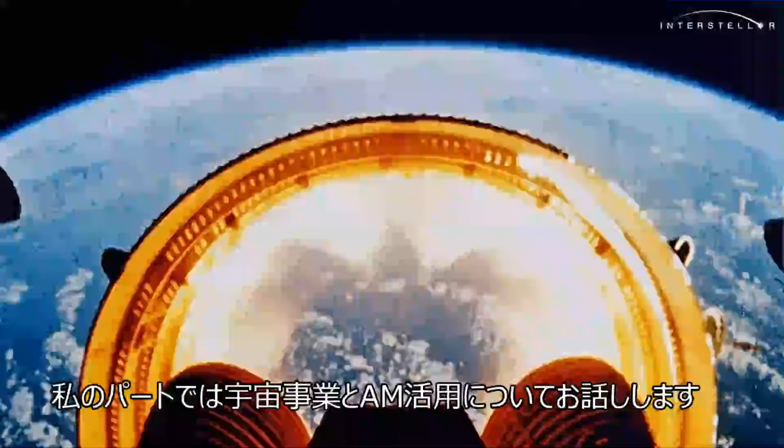So I show this picture when I do a lot of presentations to try to orient people that may not be too specific or in close touch with what's happening in space with propulsion and launch vehicles, and even exploration beyond low Earth orbit.

This is a shot of the Saturn V when it's staging in Earth orbit right before it gets ready to take the astronauts to the moon.

And this is one of those images that for me really tells the story of where Interstellar is focused on the technology and the capability to move people and cargo out into the solar system.

One of the ways that we're going to help accelerate that process is through advanced technology for propulsion systems and then spacecraft systems as a part of our long-term vision.

So our team is very experienced. I mentioned the three founders, but we have a rich heritage with over 130 years of experience across a variety of different industry and government programs.

We're definitely well experienced with all of the different propellant combinations, from kerosene to methane to hydrogen-based systems and storables.

And we have one of the more unique teams and capabilities in small business in aerospace for a startup in the industry today. I'm really excited to have this group of folks with me as we push the boundaries and the envelope of human expansion into space.

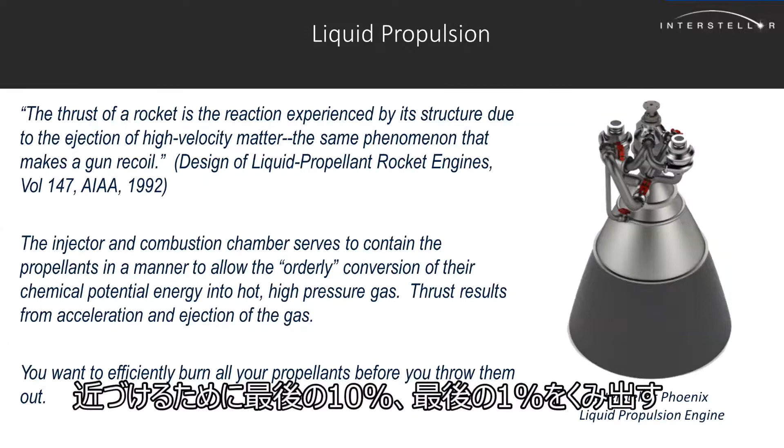And so the goal of the engineer as they design injector systems is always striving to eke out that last 10%, that last 1%, to get as close to 100% efficiency as possible.

So I also wanted to add a few words on engine cycles. There's a lot of different engine cycles. The point here is that not all engine systems are the same, but I'm fortunate to live in a time...

When I started my career, there was only a few places that you could work on engine systems. You could go to work for NASA, you could go to work with Aerojet or Rocketdyne, but there were very few places, you know, 20, 25 years ago where you could go work on the development of these systems.

Now we live in an era where we've really started to commercialize space, where there's so many opportunities for engineers to work on a variety of new types of systems.

So let's talk about what some of those systems look like, and then who is using those type of systems in the industry right now. Because we're really experiencing a renaissance in space that kind of rivals the 1960s, the late 50s and 60s, when we had the surge in the space program through Mercury, Gemini, and Apollo.

You have a gas that's pressurized, like helium, and it pressurizes the tanks to higher pressure, and then it pushes the propellant to the injector, and it's combusted in the combustion chamber. That's one of the simplest systems, but it's also one of the heaviest for a rocket. The higher pressure in your fuel and oxidizer tanks, the thicker the walls have to be, the heavier the rocket is, the less payload you can get to orbit.

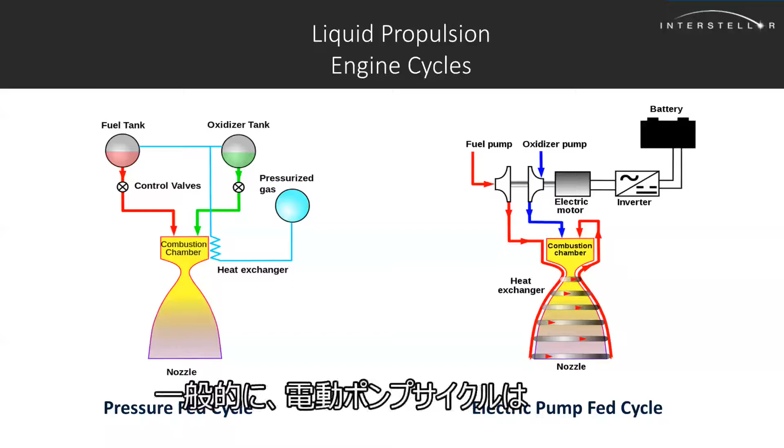These systems are typically less effective at higher and higher thrust levels because of the battery demands, electrical demands, and the weight of the electric motors required at higher and higher thrust levels.

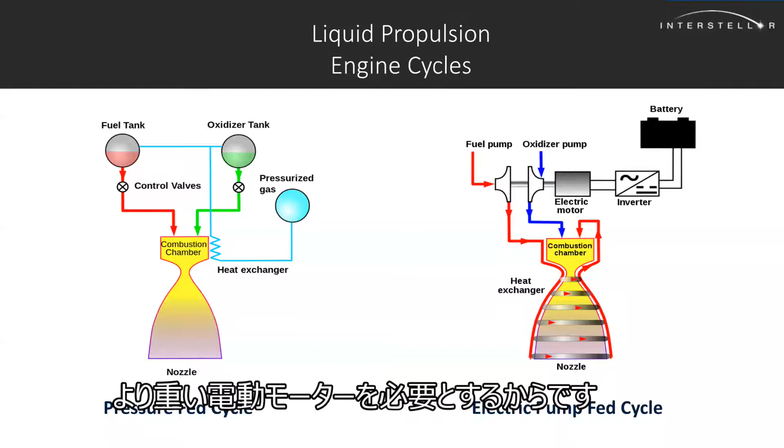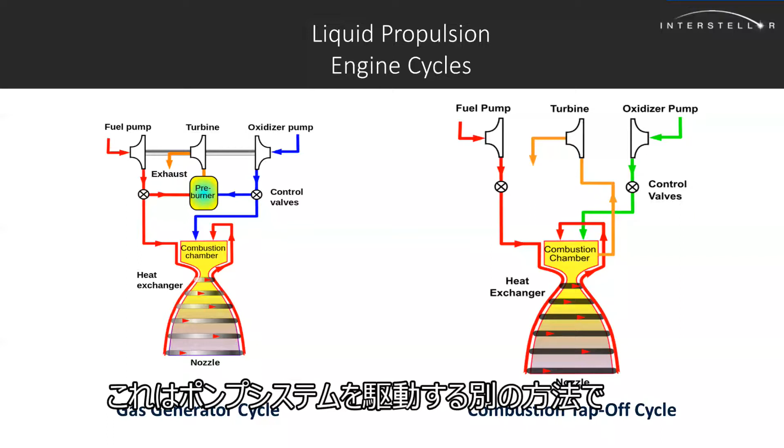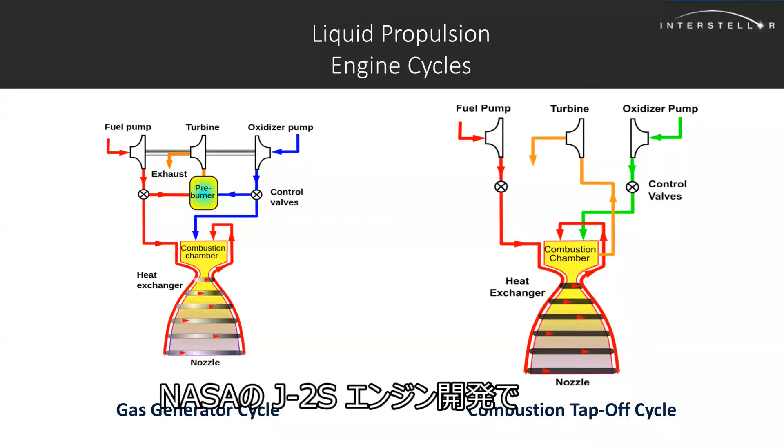A really interesting cycle on the right is the tap-off cycle. Blue Origin uses the tap-off cycle. They take a little bit of combustion chamber gas on their BE-3 engine to drive their turbine. It's another way to drive that pump system, spins up the impellers in the pump and drives the pressure to the engine system. It was also used on a variant of the J2 engine in development with NASA and Rocketdyne many years ago.

Before I get into this last one, the reason I'm showing this is to give a little bit of introduction to the different types of engines, and also they all utilize similar components. The cycles are laid out differently depending on the level of complexity and performance that is acceptable or required. But for those that are interested, there's a couple of great reference books out there that go over all of this information in great detail. They're kind of the aerospace engineer, rocket engineer Bible, so to speak. There's Rocket Propulsion Elements by Sutton, which is a fantastic reference.

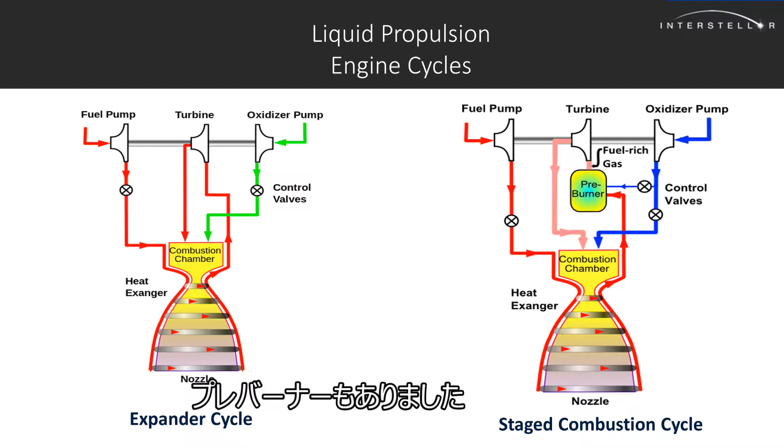So the staged combustion cycle is representative of the space shuttle main engine, and then the expander cycle is what you would find in the RL-10 system, which is an upper stage engine. The expander cycle is a very simplified cycle. It takes the energy off of the nozzle in the combustion chamber and heats up the coolant, or the fuel in this case, to drive the turbine. So again, all these systems have some flavor of pump, combustion chamber, and nozzle. Some of the flavors have a gas generator or pre-burner as well. But a lot more nuance than maybe what has been understood by the layperson in terms of liquid propulsion.

So I wanted to show where some of these components live in a real engine rendering. At Interstellar, we really leverage advanced manufacturing and 3D printing with our innovative clean sheet approach. What we do is really different than anybody else, because we've rethought how we do design for propulsion and spacecraft systems to take full advantage of the capabilities that exist in the additive manufacturing landscape. And as you'll see later, we're really innovating even beyond that, pushing the additive capability even farther than present day to enable unique designs and performance improvements that haven't yet been seen in the industry, and we're excited to bring that to the forefront.

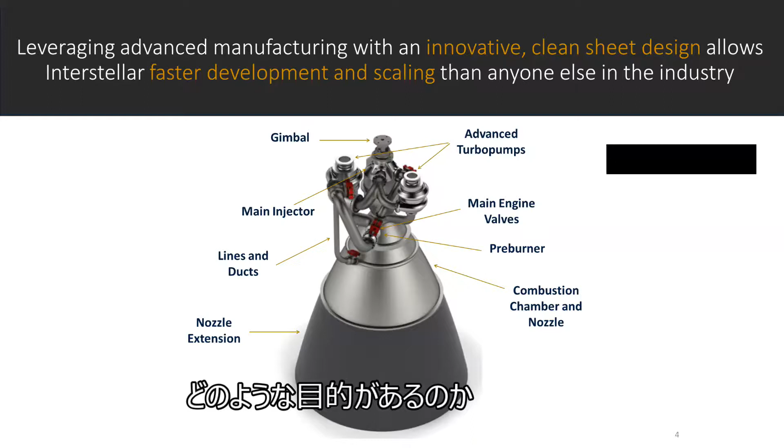On the lower part of the chart, you can see some of the basic component features of the rocket engine: the gimbal, which attaches to the vehicle and allows the engine to move to steer the vehicle, advanced turbopumps, the main injector, main valves, lines and ducts, the nozzle, and the combustion chamber. Wanted to give folks a feel for where these components live and their purpose in terms of the engine cycles we discussed.

Liquid propulsion hardware is really ideal for additive manufacturing. To tell a bit of a story, when I started my career 25 years ago, it would take years and millions of dollars to work through R&D because of the complexity of assembling hardware for a rocket engine system that needed to survive extreme thermal environments. You have cryogenic temperatures on the pump ends and 5,000-plus degree flame temperatures in the combustion chamber, daring to melt the whole system down. You'll never find a more challenging engineering environment than developing a new rocket engine system.

It requires so many disciplines—at least 13 different engineering disciplines involved in the turbo machinery alone, plus multiple disciplines for every component and then marrying the system itself. Because of the extreme environments, it drove extreme manufacturing techniques, which drove a ton of touch labor and extreme costs—that's why launch vehicle systems have historically been so expensive. The hardware is complex because the environment is extreme, and these systems were also expendable, thrown away after every use, which obviously isn't super cost effective.

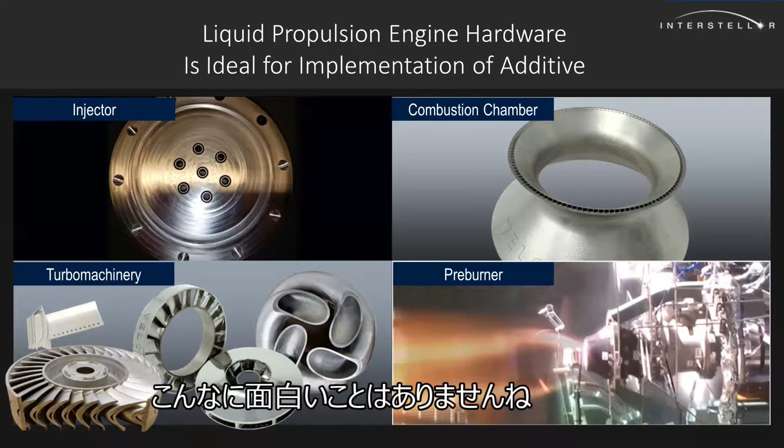But even with all that said, especially with the rocket engine impellers on the turbopumps, there are still some limits to the geometry. Ideally, you have some pretty complex high angles and extreme curvature requirements within those pump impeller geometries that, as a designer, you'd really want to use to make the components smaller and lighter and higher performing. But even up till recently, we've had limitations that most people who work in the industry and with additive understand, what the 45-degree rule means. As you change to these angles with these overhangs, as you see in this image, it gets more and more difficult to maintain structural integrity as well as surface finish. So as good as additive is, there has still historically been some limitations in the geometries we can achieve.

And then the other part of that, especially for impellers but also with every other component, is the ability to use support structure to obtain some of these desired geometric features. This is problematic because sometimes you require support structure to make your creation real that you could never fully remove, or the removal of that support structure is very costly and time intensive. So this has been another focus of Interstellar working with VELO, enabling the capability of the print machines to make our design improvements come to life by eliminating that support structure completely, which really helps us focus on reducing post-processing time.

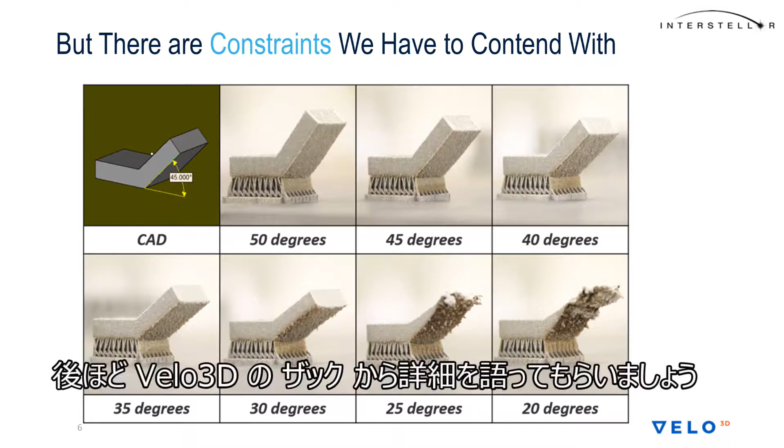And I'll invite Zach to comment here a little bit as well, but we can go ahead to the next chart. Some of these challenges are on this chart as we segue from that last one. I've mentioned a lot of these things already, but also, when you talk about NDT and qual inspect, Zach's going to talk about that a little bit more here in a second, but all those things are critical.

When we first started using additive a few years ago, there was a lot of concern about flying these parts on different launch vehicle systems and our ability to qualify and certify that. We've come so far with our ability to produce additive hardware for engine systems with the material properties required to survive those extreme environments. So when you take a system like Interstellar is developing, where we have quite a bit of reusability and life required of our parts, the early days of additive, the material properties really didn't lend themselves to that.

But with the improvement in the technology, especially over the last 5 years, and now taking a step beyond that with Sapphire, it really helps with the longevity and life of our parts and our ability to run them through the test programs that our customers require for certification and qualification.

For us in development, though, it's really all about that time for post-processing, like I mentioned before, speeding the pace of development, which is great, but also that translates into production as well. So when we look at our first product, or one of our first products, which is our Phoenix engine system, it's not just about using additive for development, but also how that development cycle translates into production, because this is an all-additive system, and that's where the industry is moving.

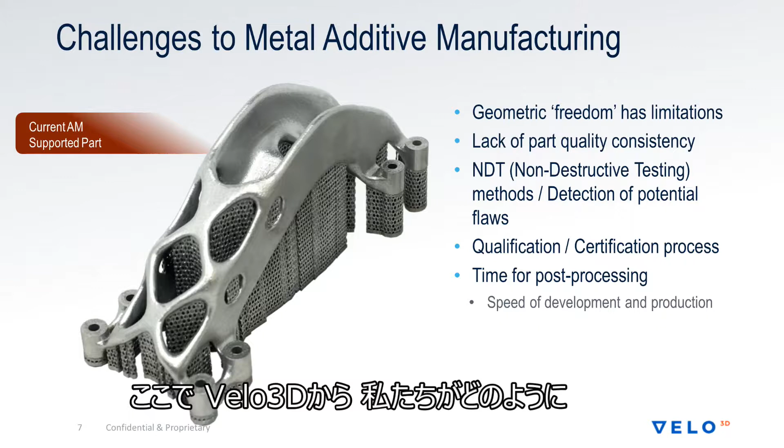That's the right way to go, and we have more work to do on the post-processing front, especially when it comes to support structure and heat treatments, etc. But I think that's a nice place to invite Zach to jump in and talk about some of the ways we're tackling these challenges on the print side.

I really appreciate it, Jeff. My goal here is to provide a little bit of background as to what VELO is trying to accomplish and how we're working with companies, especially like Interstellar, who are really pushing the boundaries of what's possible and utilizing our technology to advance their systems pretty dramatically.

As Jeff mentioned, one of the parts that has always been a really good candidate for metal additive manufacturing is a shrouded impeller, which you see on the right. This is one of our canonical parts for VELO3D because it's a part we really focused on when developing our process and system to extend the capabilities of laser powder bed fusion, which is what our system does.

So you can see here on top how you would need to support a shrouded impeller if you were building it on a traditional laser powder bed system. All of the red lines you see are support structures. If you were to print this on a conventional system, you could print it, but then you have to deal with getting those support structures out in order to have a usable part. This really makes laser powder bed fusion a non-viable solution for these very complex geometries with internal passages.

So VELO3D set about to develop a process and a system that could really extend the capabilities of metal AM to the point where they would start to be much more widely useful across a range of applications. This bottom picture shows how you would print the part on the Sapphire system, and what we've been able to do here is eliminate all of the internal support structure.

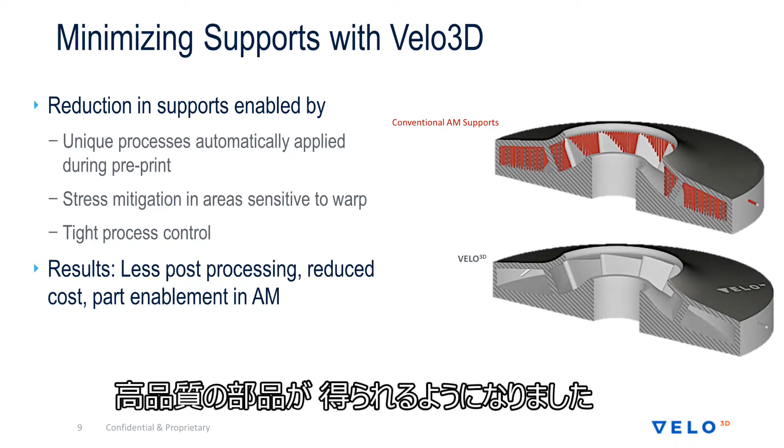We focused pretty intensely on process control and metrology to be able to operate our system in a much tighter process window. This is what really enables us to print low angles, and to change the machine architecture in such a way that you can print low angles consistently and know that you're going to get good quality parts out at the end of the day.

So as Jeff mentioned, one of the main drivers for using metal additive manufacturing is to reduce the iteration cycles and get to a final system configuration much more quickly. It's definitely an effective tool in that regard. But in addition to speed, one of the other things you have to deal with is cost.

I like to say that engineers will always find a way to make something. If they need a part, there's always a way to manufacture it. But often that comes at a pretty hefty cost. And if you're looking at making a complex system like a rocket engine or turbo machinery, you can get those parts, but it's going to be relatively expensive.

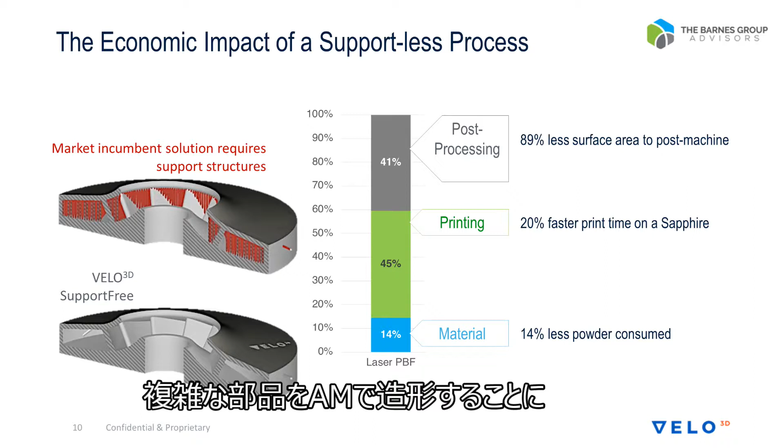So not only are we able to reduce the design cycle time to get these parts, but the cost is also dramatically reduced, because a lot of the cost of additive parts is really in the post-processing. We see examples where almost half of the final part cost is due to post-processing. So if you can reduce that as well as reducing the cycle time, then you really start to democratize the manufacturing of some of these really complex parts and systems.

What is our system capable of? When we look at the applications where we can really provide quite a bit of benefit, turbo machinery and rocket engines have a lot of the geometries that capitalize on our technical capabilities. So if you look at some of the examples on this slide, on the left-hand side we have impellers or turbine components, and really here what we're using is our low angle capabilities.

And this impeller that you see here is actually 0 degrees on the shroud at the exit of the shroud, on the OD of the impeller. So the shroud is completely horizontal at that point.

We're able to print down to 0 degrees without using a support structure, which means that this part doesn't require any support removal at the end of the day after you finish printing it.

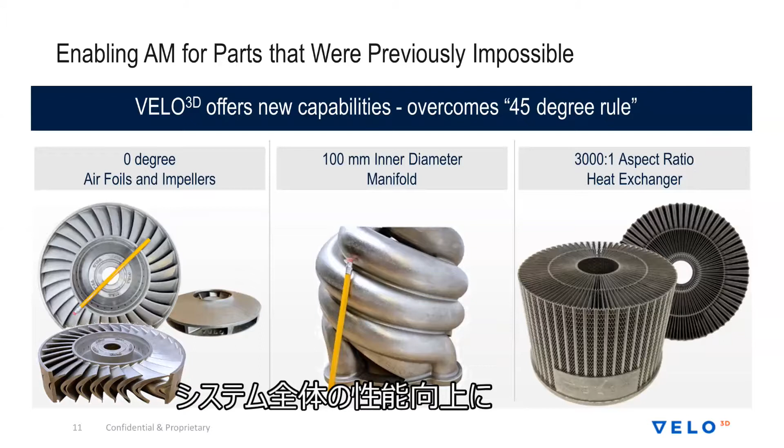One of the places this is very useful is if you have heat exchangers on a system, or if you're looking at a smaller rocket engine, a smaller nozzle and combustion chamber, and the regeneratively cooled flow paths inside those nozzles and chambers. So you can really leverage the capabilities across the entire system to realize performance improvements.

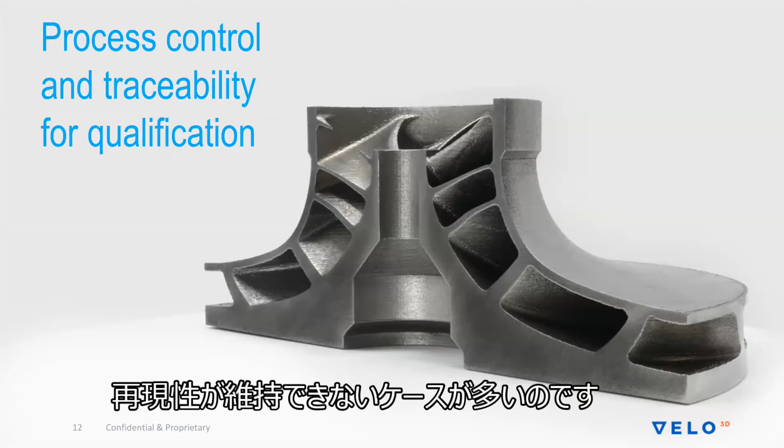One of the things we realized pretty early on is that making these geometries is definitely a step in the right direction. Enabling people to make these very challenging geometries is what's needed to expand the application space. But one of the things you also have to address is the quality of the parts. If you can print very interesting geometries, but the part quality is not good or it's highly variable, then it's not really a useful solution in a lot of very high demand, mission critical type of applications.

One of the things I like to quote whenever I'm talking about quality, and it's especially appropriate here, is the NASA Marshall Space Flight Center standards for laser powder bed fusion. This quote really captures one of the main challenges in qualifying metal additive manufacturing, which is that the largest latent risk in the utilization of laser powder bed fusion parts in critical spaceflight applications lies in the limitations to verify individual part integrity.

So summarizing what this says, the machines available today are capable of making very high quality parts. But one of the challenges you have as an engineer, as an end user of these parts, is knowing whether or not a specific part is very high quality. That's one of the things VELO3D also set out to solve, in addition to the geometric limitations, giving end customers the confidence they needed in these mission critical components.

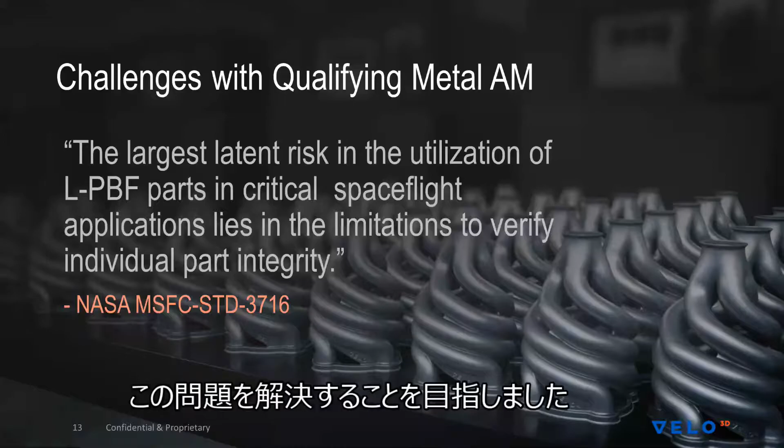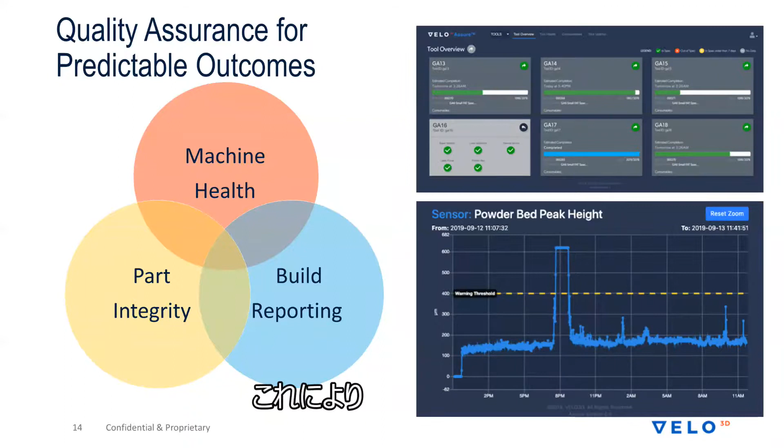So the way we approached the quality assurance problem was from three different aspects. We have machine health, knowing that the system is nominally in spec and calibrated so that you're ready to start runs, and then you know your complete fleet status of all the machines you're printing on. And then to monitor the build as it's occurring and be able to infer part integrity from that data.

The final step here is to tie all this together in an easily consumable fashion, so you have build reporting and you have traceability and documentation of not only the machines, but of the builds and the part quality once the build is finished.

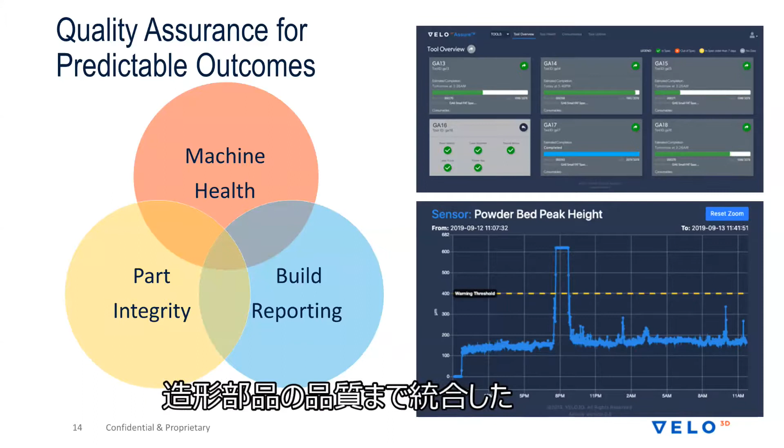The first aspect of this is machine health. And this is something that seems very rudimentary, but it really is something that's not addressed in a lot of the systems that have been available in the past.

Going back to the NASA Marshall Space Flight specs, they're requiring optical components, the optical system of these machines, to be calibrated every 90 days. In the spec, they basically give a rationale that says they would like this done more frequently, but recognize there's a lot of overhead and cost in doing this. So if we can do it every 90 days, that will at least suffice to give us confidence in the parts. But, and this is an important but, if the calibration every 90 days is found to be not within the specified limits, then all of the parts made in the previous 90 days, or until the last known good calibration, are non-conforming, which means they can essentially be scrapped.

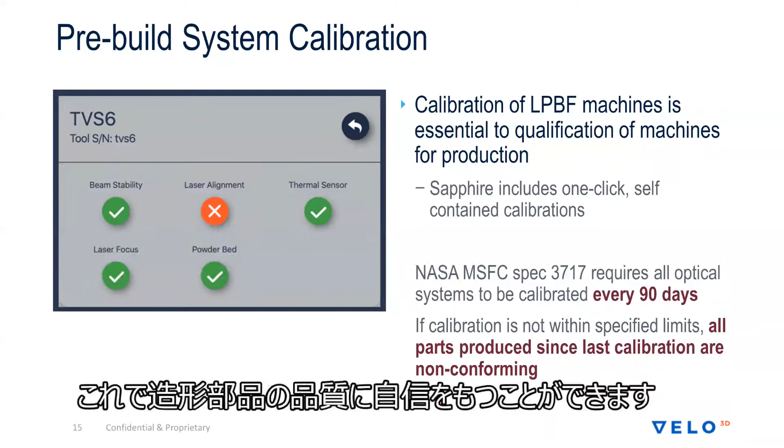And so you could have somebody who's producing parts that has made $250,000 worth of parts that are now non-conforming. So we set out to make a system that is calibratable by the user. You can do it from a single button on the user interface and check the machine calibration before every build, so you have complete confidence that the system is nominally in spec before you build a print, and every print thereafter.

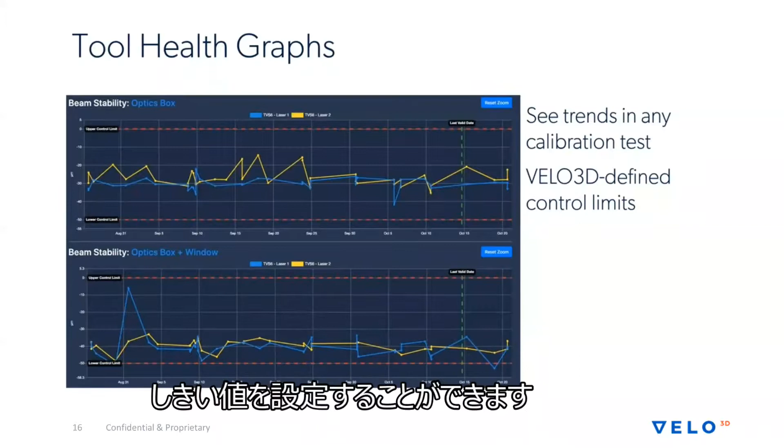One of the other critical aspects is looking at how the system is behaving over time. So we've provided control limits on all of our critical parameters and tracking of all these key parameters within our software product called Assure. This is useful not only for statistical process control as you're printing parts in production, but we also do this on a per-build basis. So in every build we're tracking the critical parameters, with control limits where we know the process is good and making good parts, so the user has much higher confidence in the quality of the part they get out of the tool at the end of the day.

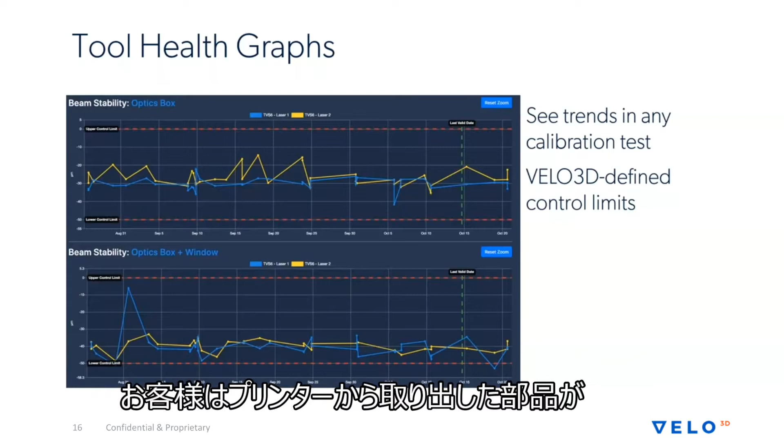So the goal here is really consistent part quality, and the way we've gone about addressing this is really captured in our Assure quality product, which gives the end user unprecedented traceability. You can do these pre-build calibrations with single clicks from the user interface, so it's easy to know the system's in spec and you're good to go to print parts. What you see here on the right is one of the readouts from the build report that shows the optical system health prior to a print, and this is included with every print.

Along with the runtime monitoring, where the build is monitored in real time with real-time reporting, and the build report generation, we feel we've captured a lot more detail around how the system's performing. This, combined with the geometric capabilities of the VELO Sapphire system, is really helping to open up a lot of new applications. It's really awesome for VELO3D as a company to be working with companies like Interstellar Technologies, who are leveraging this and starting to make some really incredible products out of it.

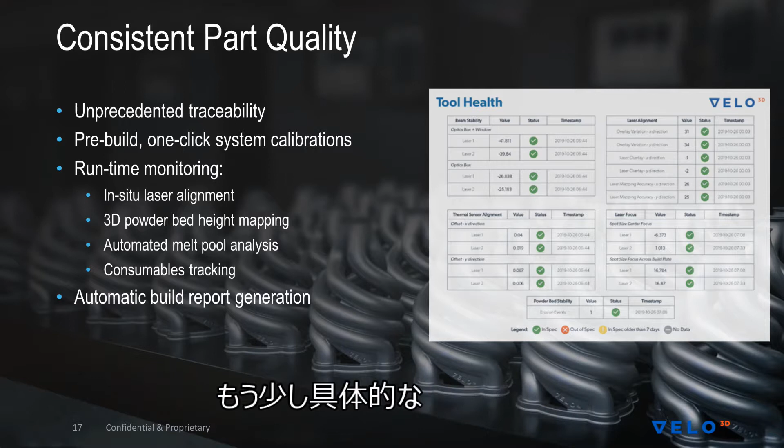With that, I can pass it back to Jeff to go into a little more detail about one of those. Thanks, Zach. So one of the questions I get all the time from people is, well, rocket engines are complicated - how do you know the parts are good?

That's why Zach's commentary was so key just now, as we get into the meat of what we've been doing recently. That's so exciting. There's been so many incredible developments in the industry to produce quality parts that have a great pathway to flight. At Interstellar, our team comes from a rich heritage of not just design and R&D, but manufacturing, testing, and flight operations for traditional as well as additive parts and systems that have gone on to do real-world missions.

And that possibility wasn't there even a few years ago. So as commercial companies grow and evolve and increase their capabilities and move into these technology areas, it's been exciting to be a part of that over the last decade or so. One of the things we do better than anybody else, though, is we've really reimagined the design process.

One of the things we focused on in years past was really how do we get the industry to produce larger parts, instead of breaking out of that smaller 300 millimeter square bubble, and move into larger and larger systems. That was an early focus of this team's energy.

But really lately, our focus has been working with companies like VELO3D and Zach, enabling newer, creative, more robust designs that were not possible even by yesterday's standards for printing. So obviously we're fully designing to utilize AM as the manufacturing approach in all the components of our Phoenix engine system. What we mean by that is that everybody's printing parts now, but there's still a lot of parts out there being produced that could be made by other means. And that's not the full utilization of the technology, especially from an innovative standpoint at a company like Interstellar.

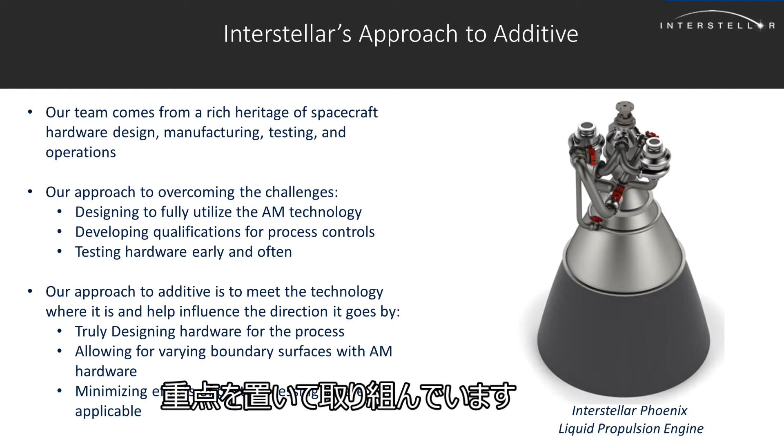A big focus of our efforts this year has really been minimizing that post-processing time across the board. So let's get into the injector real quick.

I mentioned the function of the injector already, but basically you've got all of that energy in the propellant of your rocket. In the case of all these liquid systems, you've got to mix the fuel and the oxidizer as efficiently as possible, burn it, and throw it out the back end to produce maximum thrust, maximum capability based on the mass of the system and the payload you want to carry. So the goals when designing an injector are really the most efficient injector elements possible, manifolded properly to give you this ideal mixing and combustion process that allows your device to create a 5,000 plus degree flame that's not melting the rest of your engine system.

That's definitely one of the challenges of designing these things. And the more efficient your injector is, the more energy you're releasing, the more extreme the environments you're having to design around. Keep in mind, we're not designing these anymore to be expendable, one-and-done parts—these are all reusable. So when we're talking about improved efficiency and stability, we're really talking about creating the environment where these propellants mix in a stable way and burn without these damaging oscillating behaviors.

If you're burning kind of uncontrollably, you're going to see a lot of vibration and a lot of pressure swings, which can damage hardware. So you really want to limit that to the maximum extent possible for a rocket engine system, and mix these things to almost perfect efficiency so you can convert all of that chemical energy to energy moving out the back end kinetically, moving your rocket.

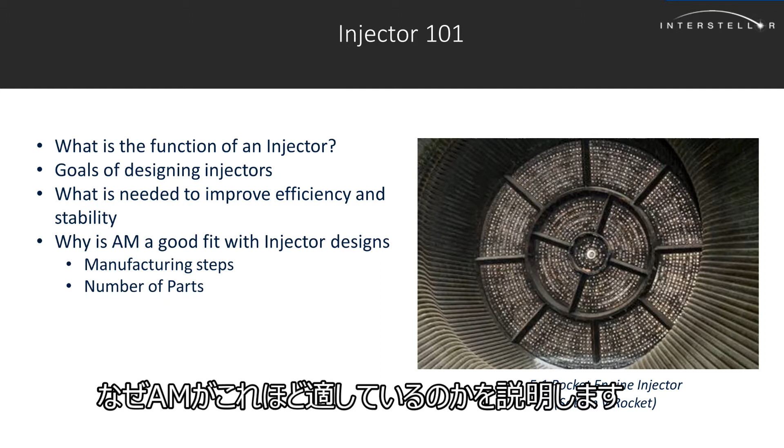But going into the next chart, let's talk about the complexity of a main injector and why AM is such a good fit. It used to be hundreds and thousands of parts needed to create an injector, all made by hand, and all very intricate. On the space shuttle main injector specifically, you have hundreds of individually produced mixing elements.

When manufacturing is that complicated, especially in development, you're definitely going to see failures, and certainly the Space Shuttle Main Engine program saw their share of failures. But the manufacturing technology at the time, that's where it was, and that was really the best way to be able to produce a part that complex. You can imagine what the price of that part is when you have that many piece parts that have to be critically assembled with very tight tolerancing to survive an environment like a rocket engine combustion chamber.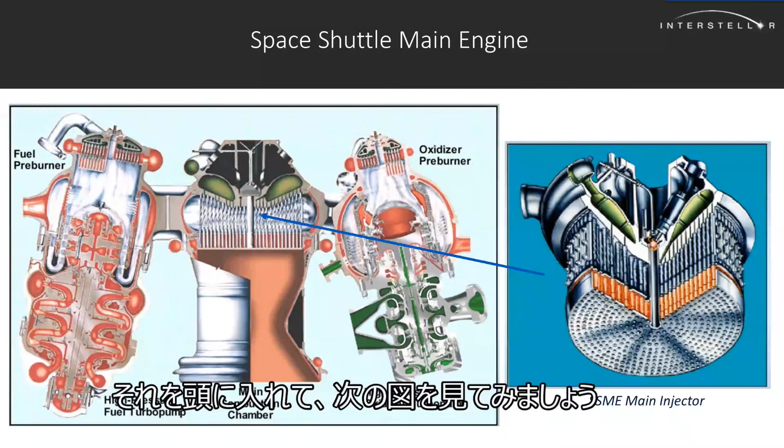So if we keep that in mind and go to the next chart, this component more than all others is so ripe for additive because of what it offers in terms of cost and time. So you can take a very complicated injector with hundreds or thousands of parts, and now you can start to create it monolithically. There's a couple of examples from the public domain.

The right photo shows a NASA additive injector from their additive engine programs, which was a monolithic piece. Still required some other pieces to be welded and assembled, but still, it's a great part reduction from the way they used to be produced.

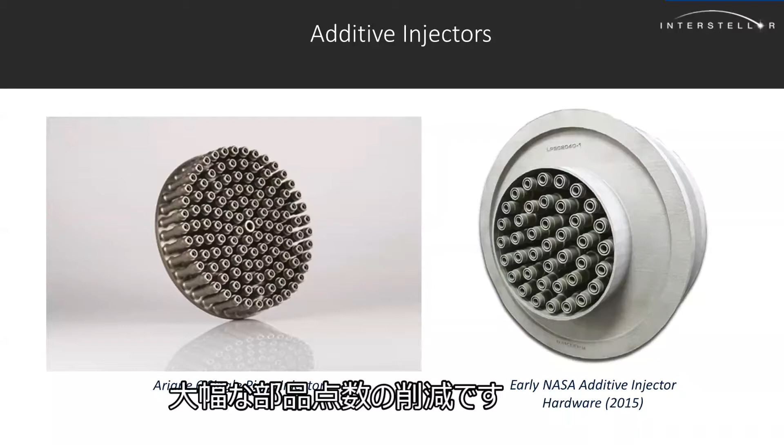The Ariane 6 on the left is a really interesting piece. They wrote a public paper where they actually quoted their part count reduction. And the part that you see there, which is an injector element core for their Vinci engine, was 248 parts that was reduced to one monolithically printed piece. Now, it obviously still needs the manifolding, the housings, the faceplate, and some other features too, so it's still not truly a pure monolithic part yet, but an incredible advancement brought on by the ability of additive.

And that's why you saw so much focus on injectors over the last few years with application of additive for rocket engines.

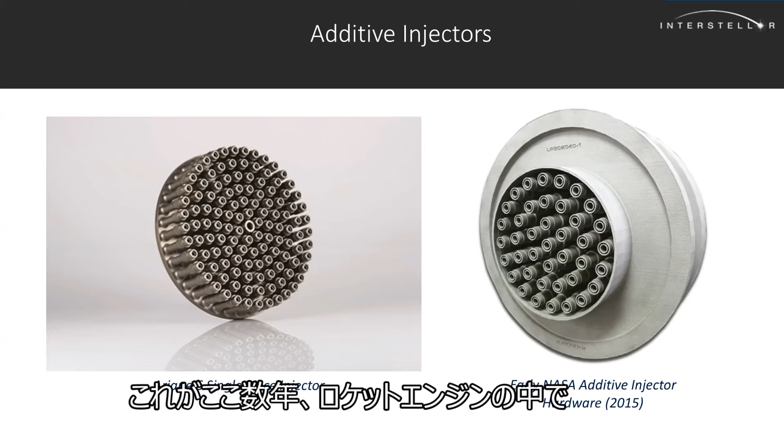So we partnered with VELO to use the Sapphire machine to test the limits of what we thought was possible with injector technology. So rather than aggregating hundreds of parts into a single-digit number of parts, we wanted to produce a monolithic piece that was ready for testing, and do it first at subscale, then at full scale for our Phoenix engine that totally eliminated part count down to 1, minimized the amount of time to go from the machine to the test stand or eventually the engine assembly.

But there was still some things we needed. So we've innovated a revolutionary new design for injectors for liquid rocket engine systems, but we needed a little bit more from manufacturing. Our design is possible with a combination of both our design philosophy that's unique to Interstellar and additive manufacturing, but the new capabilities we needed were in surface finishes, support structure removal, processing time, and the ability to make these things quickly and effectively in a way that was even an order of magnitude better than what's being done now.

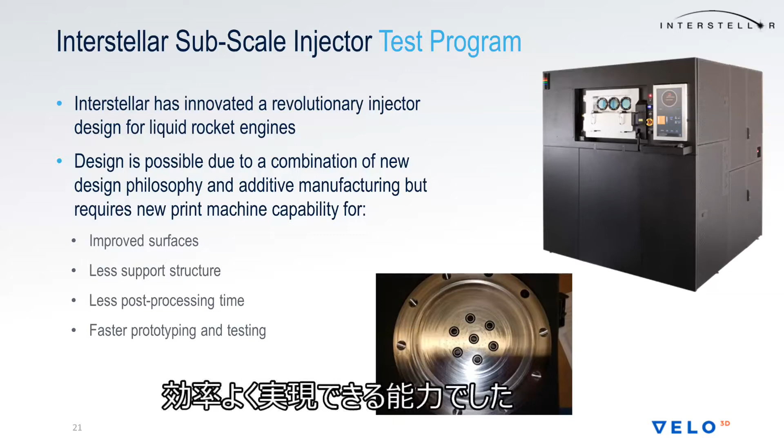So we embarked on a program that you see in this following chart where we took 2 injectors, one produced with the Sapphire machine and one with the industry standard DMLS powder bed fusion, and we ran them head to head. So we were already in the midst of development testing for the Phoenix injector. We picked a design where we could do an apples to apples comparison between the 2 technologies. And then it was very synergistic with our ongoing test and development program.

I won't be able to show all of the data today because unfortunately with COVID-19 and the coronavirus situation, our supply chain has been disrupted. We've been disrupted like everybody else, but I do want to preview some of these things for you, and hopefully we can share more of this in a future webinar or a future discussion.

But we did all the same cold flow testing, which is where you just run the propellants without combusting. We did hot fire testing, the same tests on both injectors, and then we did robust surface measurements as well as geometric measurements through structured light scanning and CMM. So what did we find?

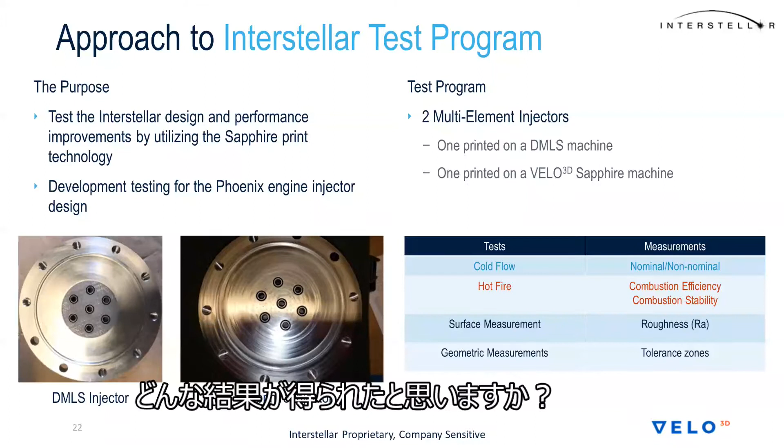Well, super interesting. We suspected and hoped that we would see the improvements, and actually we got more than what we had even anticipated. So we purposely picked one of our injector iterations that would allow us to see very clearly what these changes would look like. And what we saw, just to get to the chase, is we saw a 5% improvement in combustion efficiency. We saw a significant improvement in stability as well. Those two kind of go hand in hand, so I won't dive into all of the engineering tech speak today because we don't have time for that. But I can kind of give you some perspective.

Well, what does that mean when we see that level of combustion efficiency change? Remember, these are 2 identical injectors that are the same in every respect in terms of their design intent and the models required. The only difference is how they were produced and the outcome of how they were produced by those 2 different machines.

So if you say 5% gain in combustion efficiency, that doesn't mean much to folks. But remember back to the beginning, the key part of a rocket engine is that injector's ability to adequately mix the propellants to convert as much of that energy in those propellant tanks to kinetic energy coming out the back end. So a 5% improvement is actually huge.

It directly translates into better specific impulse, which is like the gas mileage of a rocket engine. So it's driving your grandfather's Oldsmobile at 12 miles per gallon versus driving a modern sedan at 32 miles a gallon. It's that type of

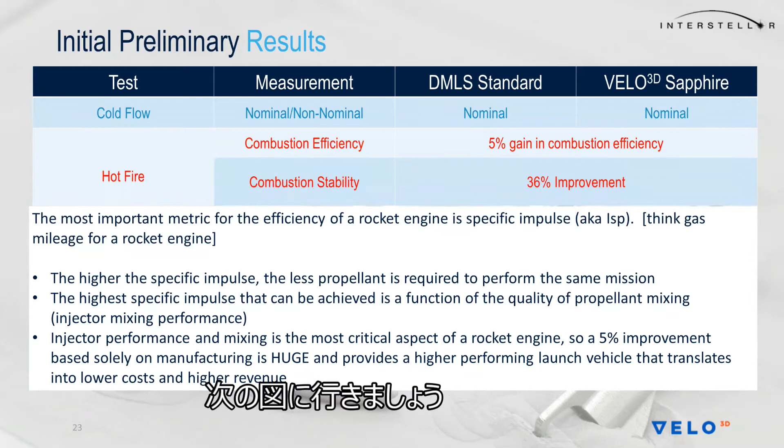enhancement. Let's go to the next chart that cuts to the chase of what that looks like potentially. Again, the images on the right show our Injector Phoenix test program. We have a great partnership. We're testing this at Purdue University at the Zucrow Labs. Special shout out to Scott Meyer and the team there.

But let's assume for a second, and then we'll jump into the conclusion, that we have 2 identical hydrogen engines. The designs are identical in every way, and we have one injector that's made with a standard DMLS machine and a second with the Sapphire.

The improvements we've seen so far in our testing program show there was a huge difference in the specific impulse, or quote unquote the gas mileage of the engine systems themselves, based on those manufacturing improvements. That directly translates into up to 20 to 40% more payload for an upper stage on different launch vehicle systems. And that directly translates into revenue.

So if you can take your existing launch vehicle and you can now change nothing but a single component in how it's manufactured, that translates into money, and that speaks to the industry at large.

Now, this was an initial preliminary assessment, so there's quite a broad range, and if I try to bring it back to reality for a second, injector design is not that simple. Some are more experienced, so they can take this capability and eke out that last bit of performance they were looking at, or you don't have to have as complicated of an injector design to still get pretty decent performance. It's kind of what that translates to.

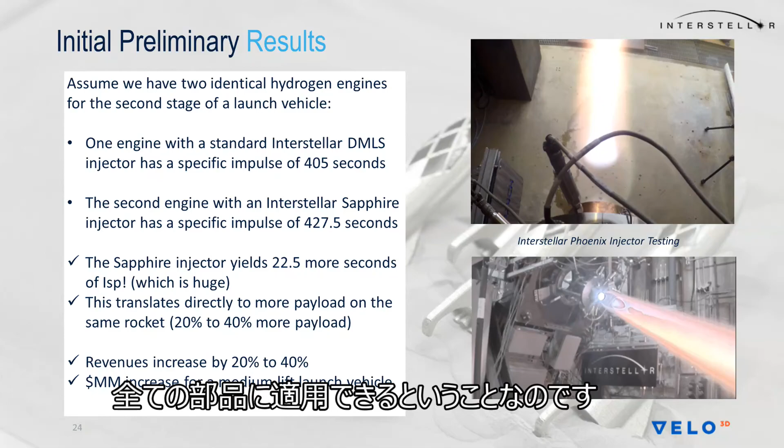So I'm going to ask Zach to jump in here too, but I think the conclusion for us today is that the Sapphire continues to expand the possibilities for us at Interstellar on our propulsion development. That flexibility, you can see what that leads to, because as a business, it's still all about how you get more to your customers and how you can grow your business faster and maximize both the performance and the economics. The Sapphire is really stepping up to answer the call of all these challenges we presently have to break through to this next level of design.

And that's really where Interstellar is, pursuing the next level of design for additive. So as I mentioned before, really excited to at least share this preview today and look forward to sharing more results as we get them as we move forward.